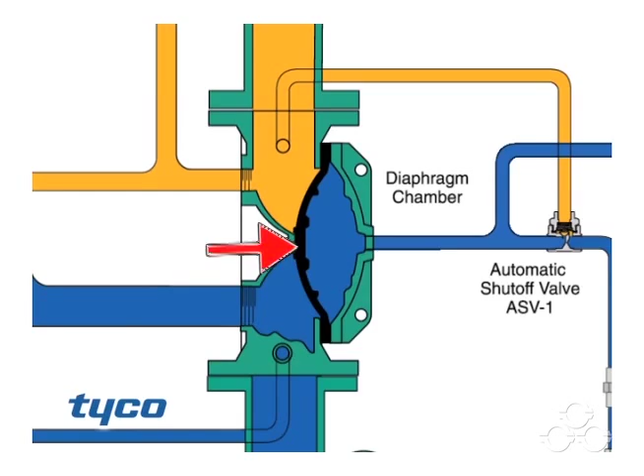The model DV5 Deluge Valve is a diaphragm-style valve that depends upon water pressure in the diaphragm chamber to hold the diaphragm closed against the water supply pressure. The system is shown ready for operation.

The water supply contains water under pressure, shown here in blue. This is also connected to the diaphragm chamber, the solenoid valve, and the manual control station.

Air open to atmosphere is in 3 locations, shown here in orange: 1. The sprinkler pipe system. 2. The water alarm switch and automatic drain valve trim. 3. The trim which connects the automatic shutoff valve.

When the fire sets off a heat detector, the detector sends a signal to the control panel. The control panel goes into alarm condition and opens the solenoid valve.

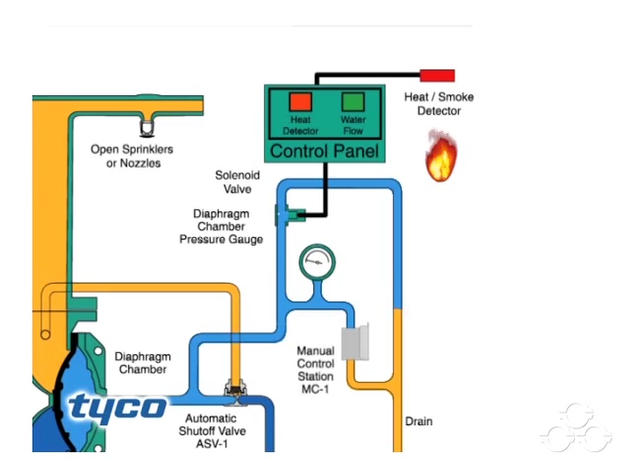The open solenoid valve will release water from the diaphragm chamber faster than it can be replenished through the 1/8 inch restriction in the automatic shutoff valve.

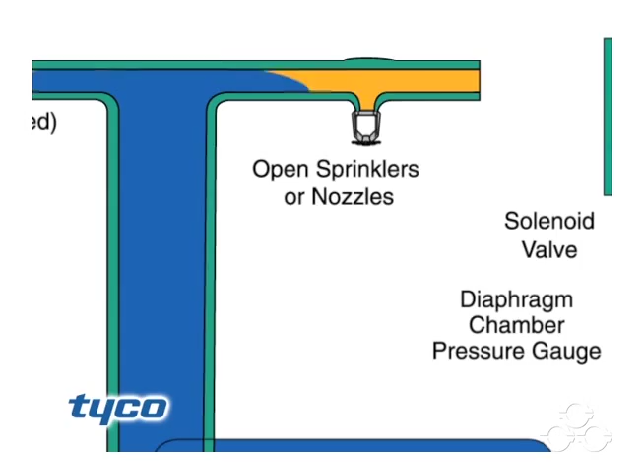The rapid pressure drop in the diaphragm chamber forces the diaphragm open, allowing water to spray out of the sprinklers or nozzles. Water flows through the system to the sprinklers and the water flow pressure alarm switch, activating the alarm.

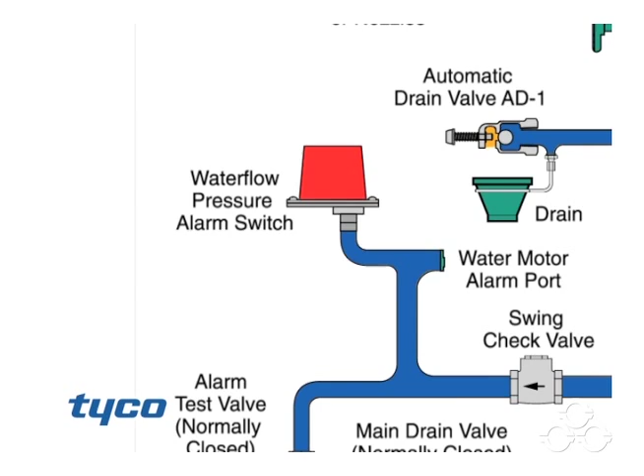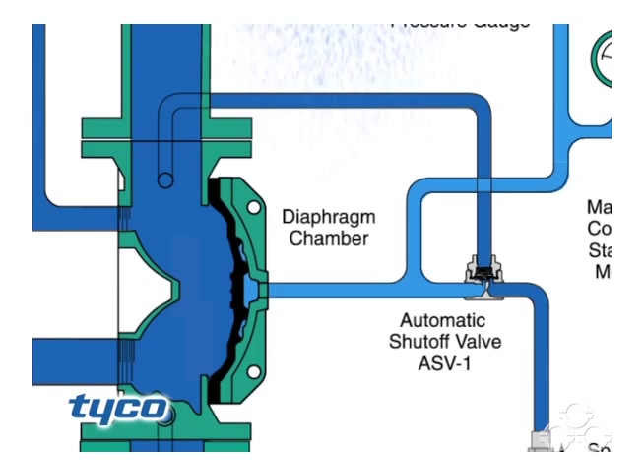Water also passes through the trim to the automatic shutoff valve to close this valve. Once closed, it will prevent the diaphragm chamber from becoming repressurized. This protects against accidentally shutting the system off if the solenoid valve were inadvertently closed.

Let's take a look at the system in action.

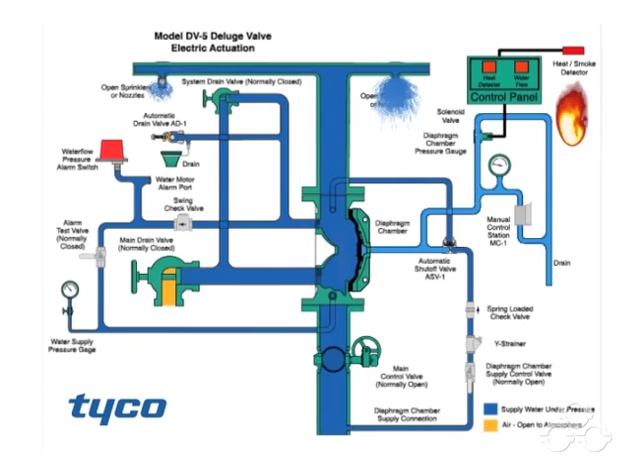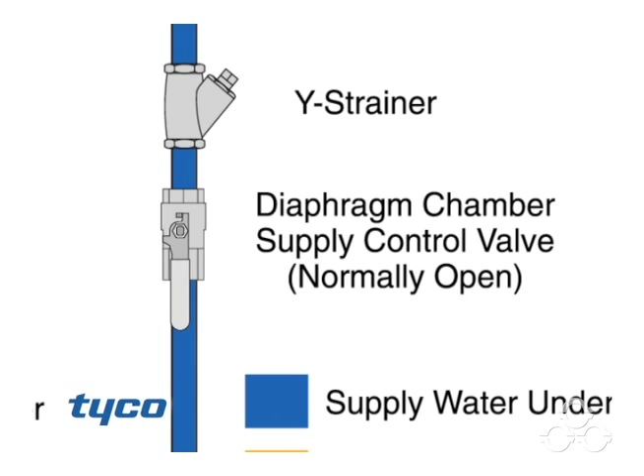To reset the valve after the fire is under control, the main supply valve is manually closed to shut off the water supply, and the diaphragm chamber supply valve is also closed.

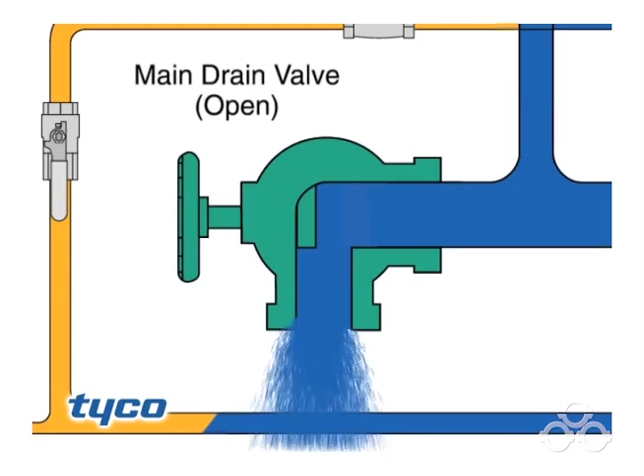Then the main drain valve and all auxiliary drains are open to drain water from the system. Once the system stops discharging water, close all drains except the main drain valve.

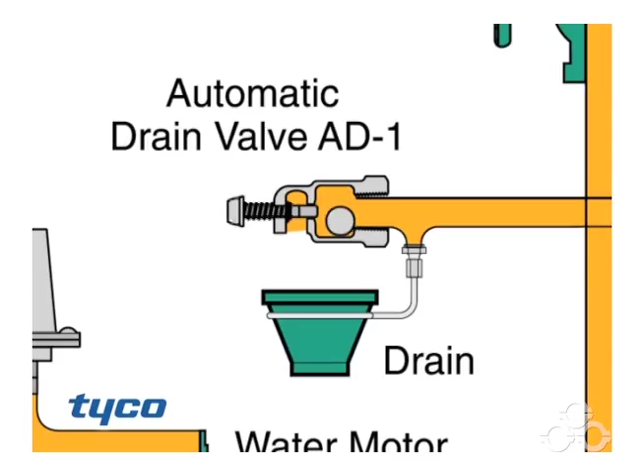Depress the plunger of the automatic drain valve to verify that it is open and the system is drained. Clean the Y strainer in the diaphragm chamber supply connection trim.

Reset the manual and electric actuation systems. Open the diaphragm chamber supply valve so the diaphragm chamber can return to full pressure.

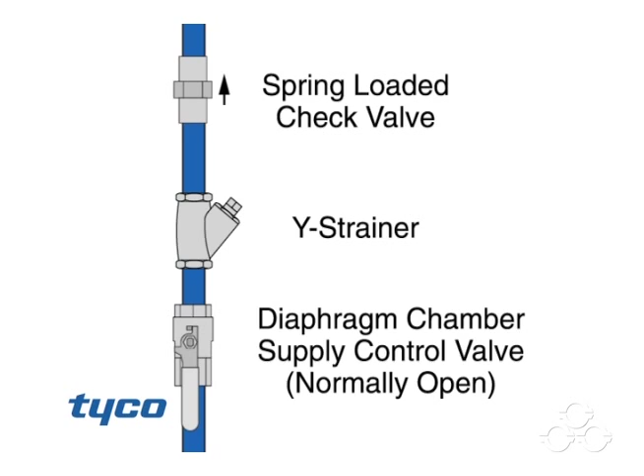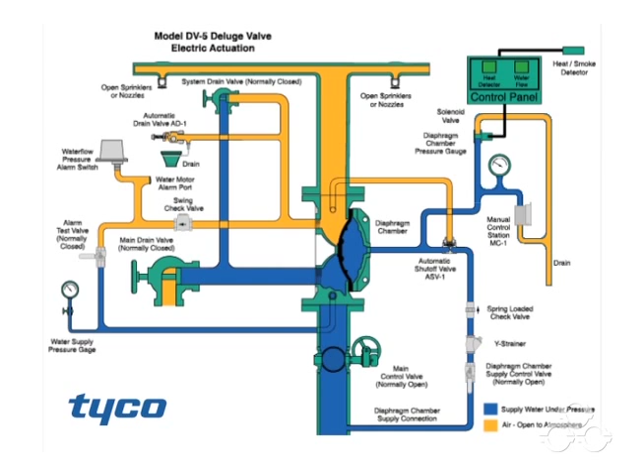Pressurize the system and perform system tests as described in the technical data sheet. Finally, slowly open the main control valve and close the main drain once water begins to discharge from the drain. The system is then ready to return to service.